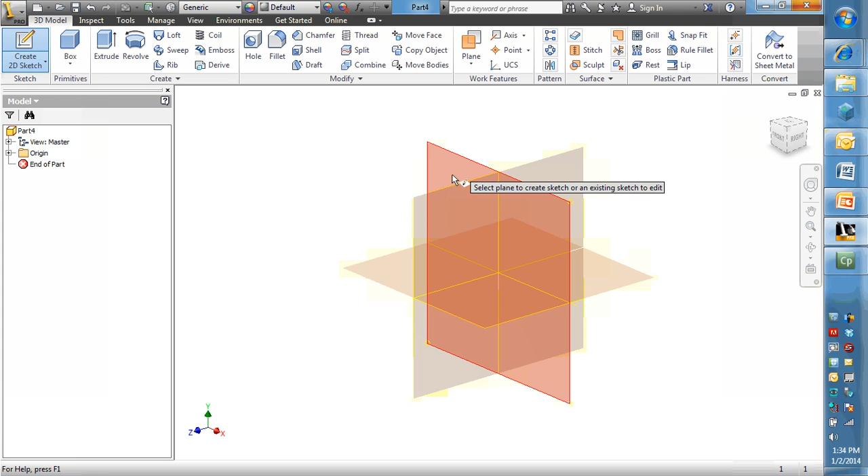The first one being XZ, then ZY, and then the last one being XY. We're going to choose this one. From what we've done previously, this would be the front view of our object.

At this point, I want you to really play around with two different tools that will allow us to create a square. The square is going to be used to create our cube. So let's go ahead and begin by going to the upper left-hand corner. You will find a cluster of tools called Draw. Inside the Draw cluster is the line tool. Let's go ahead and choose that.

Using this, you'll see as you bring your mouse over onto the screen that there's a yellow dot attached to it. That shows you the point at which your end point is. If I bring that yellow dot over top of the origin point, you'll see that my dot turns green.

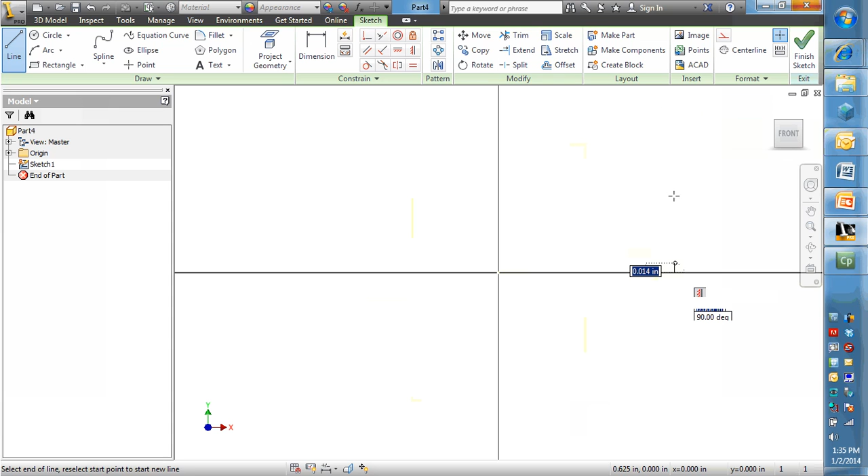Now, what I want you to do is to go ahead and move your cursor along the actual x-axis just to wherever you feel comfortable, then click. That'll place the end point of the first line. Then I'm going to bring up. I'm going to place another click. Okay, that gives us our second line.

Our third one, we're going to go over to the y-axis and click, and then back down to the origin point. This will complete our actual rectangle. Now, that's using the line tool. What we want to do is experiment with the rectangle tool as well.

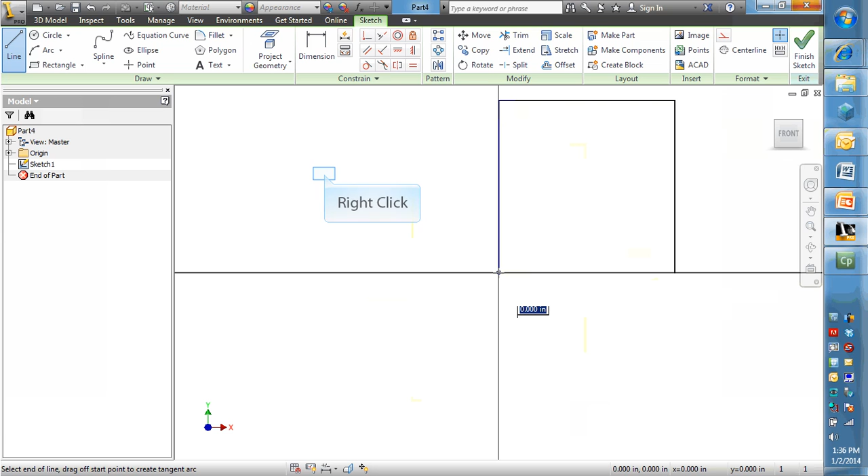So at this point, what I'm going to have you do is right-click. You're going to get all these different options. Because we're done with the line tool, I'm going to select cancel, and that takes the tool and turns it off. Now I'm going to go ahead and choose rectangle. You're going to see that there are actually four different options under rectangle. We're going to use the 2-point, and that's the most common one to use.

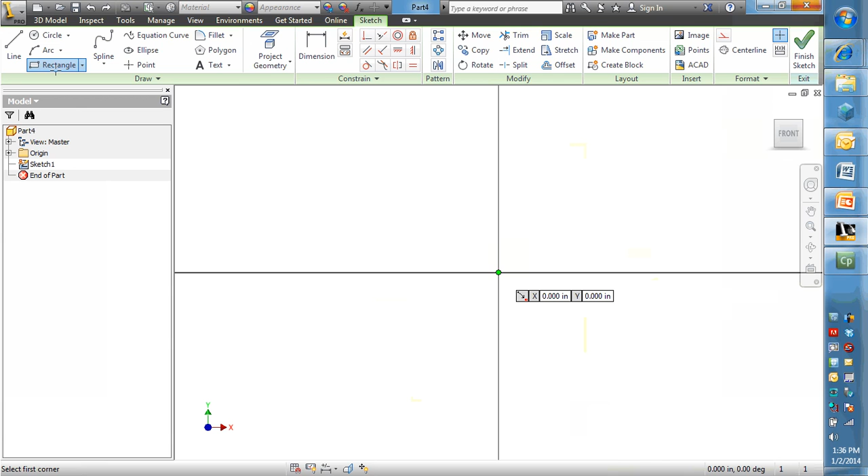Now before we actually go ahead and do this, I'm going to go ahead and get rid of my line square that I did earlier. I'm going to select the rectangle tool. I'm going to go back over to the origin. Now when I bring my cursor over top of it, you'll see it turns green again.

Now I'm going to go ahead and click and drag out a rectangle. Now at this point you say, well, we need a square. Well, we don't need to make it look like a square yet because we'll actually dimension it in the next step. So we're going to be using the constrain tools to actually put the dimensions on there. And we'll do that in part 2.